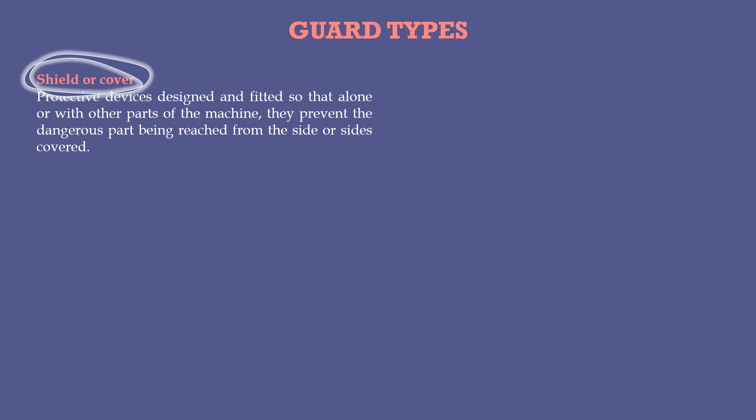Guard types. There are 3 types of guards designed to prevent contact with the moving parts by a person and/or clothing. These may be classified as shield or cover, casing, and enclosure, and are described respectively as follows. Shield or cover: protective devices designed and fitted so that alone or with other parts of the machine, they prevent the dangerous part being reached from the side or sides covered. Casing: protective device designed and fitted so that, alone or with other parts of the machine, it prevents contact with the dangerous part from all sides.

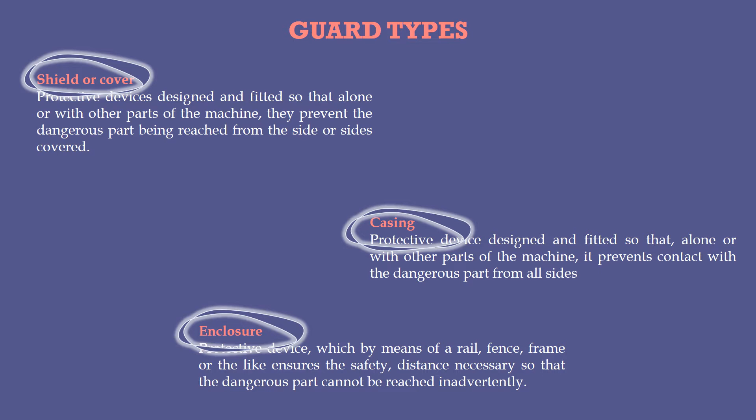Guard construction. Guards shall be sufficiently strong, unless it is clearly inappropriate. These shall, without cracking, tearing or permanently deflecting, withstand a perpendicular static load of 1,200 Newton, where a guard is in such position that it may occasionally be used as a step. Guards shall be rigidly fixed, have no sharp edges, be weather resistant and retain their strength under extremes of temperature. Taking into account the intended use, guards shall normally be permanently attached to the machine.

These may be easily opened, in which case these should remain attached to the machine in some way and should be provided with a convenient means to keep them closed. Permanent attachment includes the use of threaded fasteners, split pins, or other means that can be dismantled with common hand tools. A suitable warning notice shall be fitted to all such guards and to any opening in them without such securing devices.

In some circumstances, it is necessary for guards which can be opened to be designed so that the movement of dangerous parts is automatically stopped when the guard is opened, or the design prevents the guard from being opened until all movement of the dangerous parts has ceased. This can be achieved, for example, by designing the guard securing devices so that the part will stop before the guard is opened. Guards may be formed of a welded or rigid mesh or grill. The size of the allowable opening depends on the distance between the guard and the moving parts.

The design of the guard shall be such that it is not possible to distort the mesh or the grill during proper use in such a way that the opening size and distance relationship exceeds the limits.

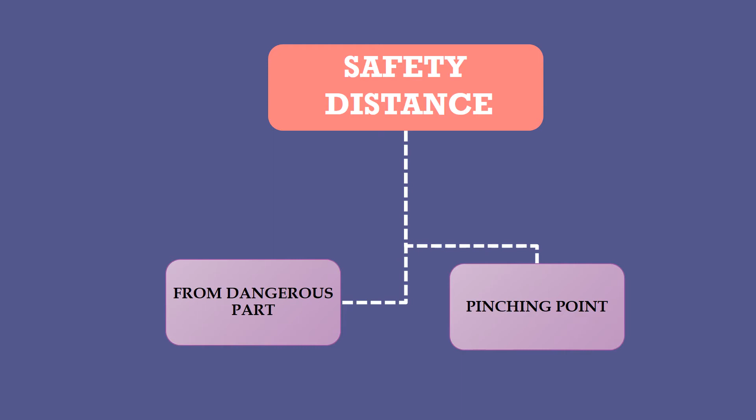Safety distance from dangerous part. The safety distance is based on measurements from the location where a person can occupy to operate or maintain or inspect the dangerous part. There are 6 classifications under dangerous parts: upward reach, reach below barriers, reach over barriers, round reach, inside reach through guards, and openings. Under openings is polygonal openings.

Upward reach. The safety distance for upward reach is 2,500 mm for persons standing upright. Reach below barriers. No safety distance is specified where it is possible to reach below a safety barrier, unless the aperture is small enough to be considered only in relation to finger or hand or arm access, in which case the requirements of openings may apply.

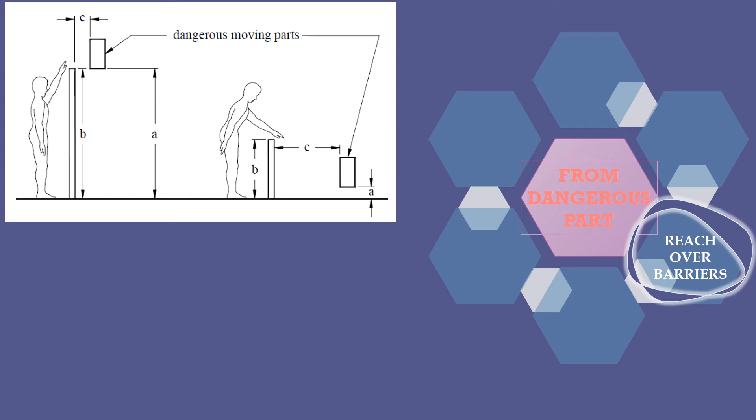Reach over barriers. The height of barriers which is less than 1,000 mm above the location shall not be acceptable. Seen in the figure is the principles for determining the distance required from a guard to the dangerous part. The safety distance for sideward or downward reach over barriers of 1,000 mm or greater height depends on: A, the distance from the ground level to the dangerous part; B, the height of the guard; C, the horizontal distance between the dangerous part and the guard. When designing a barrier, the dimensions in the table shall be met. Dimensions are in millimeters.

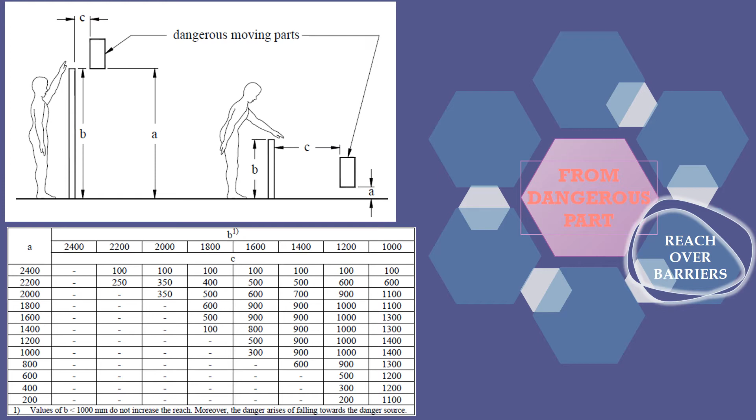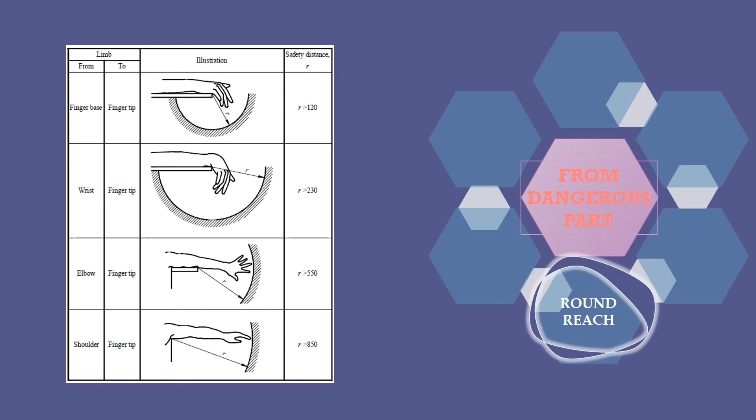Round reach. The table shows the extent of reach around barriers taking into account the aperture and the distance from other obstructions. Dangerous components shall be beyond these limits if they are not independently guarded. Dimensions are also in millimeters. Inside reach through guards. The safety distances depend on the shape of the openings.

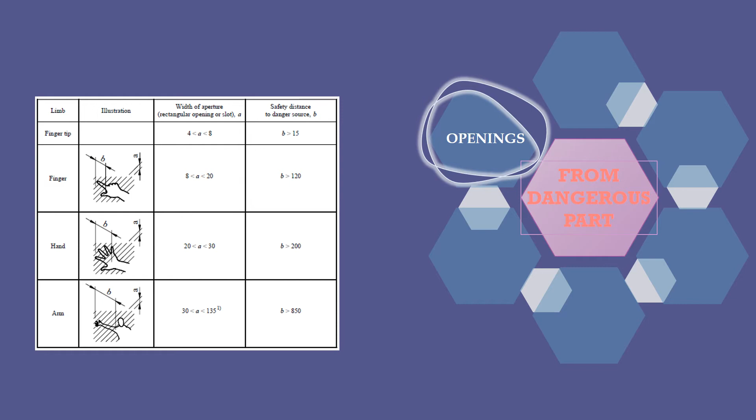Polygonal openings. Where the diameter of the largest circle that can be inscribed is not less than the distance between the 2 apexes that are the furthest apart, they shall meet the same requirements as for round openings. The diameter of the inscribed circle shall be regarded as the size of the opening. All other polygonal openings shall be regarded as slots.

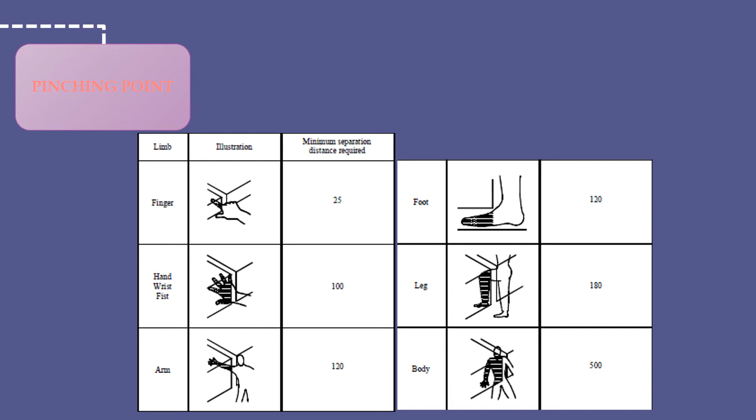Safety distance in pinching point. A pinching point is considered dangerous for the parts of the body illustrated in the table if the appropriate minimum separation distance is not maintained. The design of the machine shall ensure that the next bigger part of the body cannot pass through. Dimensions are in millimeters.

Provisions of information. Operating manuals. Where safety precautions are necessary during operation and servicing of agricultural machines, appropriate instructions shall be provided with the machine. Operating manuals shall also include a warning that a revolving hitch or a revolving clevis shall not be connected with a mating unit which also revolves on a towed machine or trailer.

Warning notices. Durable warning notices shall be affixed to the machine where parts present danger to the operator. Also included are circumstances where the inadvertent lowering of parts of equipment can cause danger. Particular danger or safety warnings shall be indicated on the notice. Existing national or other regulations may require specific symbols, sizes, layout or color. The warning notice shall be either pictorial or text in a language acceptable to the user or, if appropriate, the national regulating authority concerned.

Working stability. Machines and trailers that may create a danger to the user through tilting, as a result of the shifting of the center of gravity, shall be provided with means of preventing such danger. Hydraulically raised components that need to be held in a raised position to allow servicing or adjustment shall be provided with an independent and reliable means of retaining them in the required position.

Operator's workplace. There are 4 important things to remember when you are in the workplace: handholds and steps, operating positions, seats, and operating controls. Handholds and steps. Importance. Any machine on which the presence of a driver or operator is necessary, including any place to which access is required for service or maintenance, shall be fitted with handles or handholds and steps so the person has a safe, convenient means of mounting and dismounting.

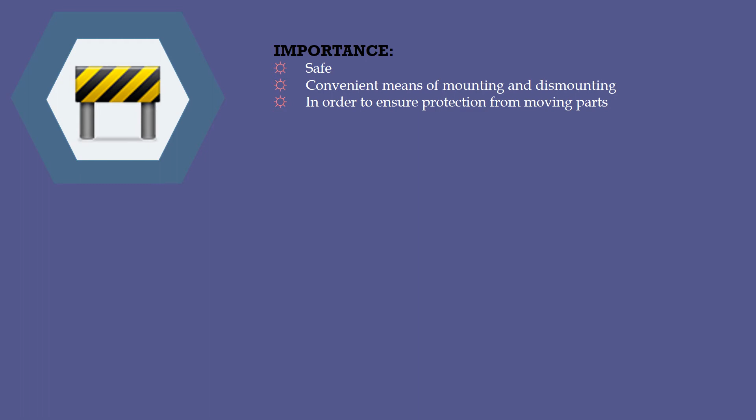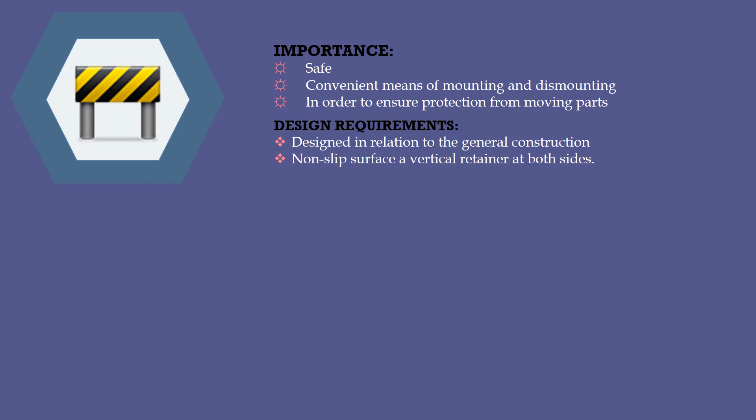Design requirements. Both handholds and steps may be parts of the machine if they are suitably designed and placed. Steps shall be designed in relation to the general construction in order to ensure protection from moving parts. If moving parts, for example tire sections, form restrictions or trapping areas with the steps, a suitable means of protection shall be provided. Steps shall have a non-slip surface and vertical retainer at both sides.

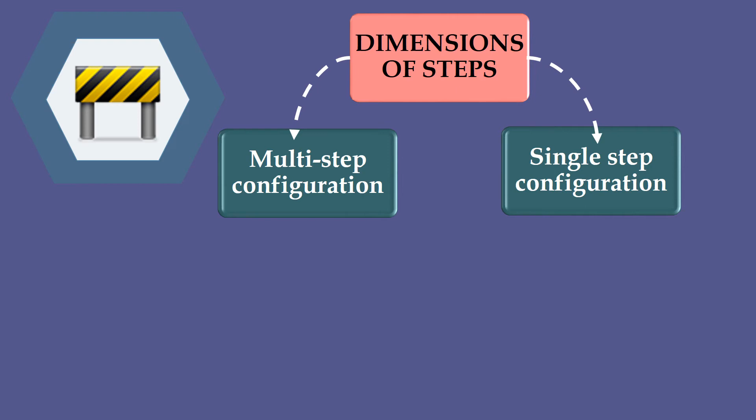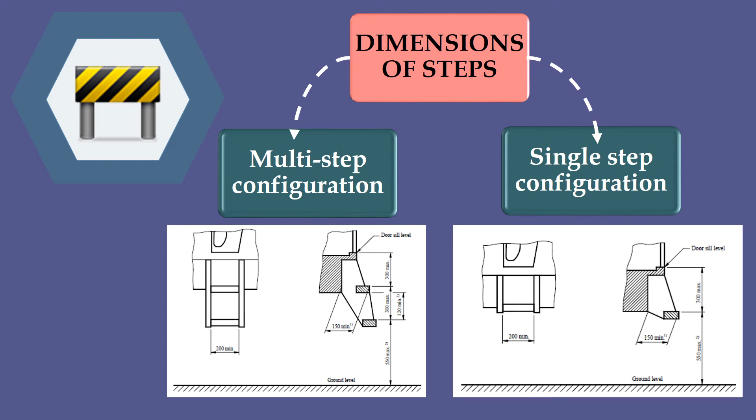Dimensions of steps. Multi-step configuration and single-step configuration. The dimensions for steps will normally be found in the parts of this standard relating to specific machines. Where there is no specific provision, the steps shall comply with the dimensions in millimeters as shown in figures. Where access is provided by a series of steps which are designed to be used alternately each by 1 foot, then the minimum width and height specified do not apply.

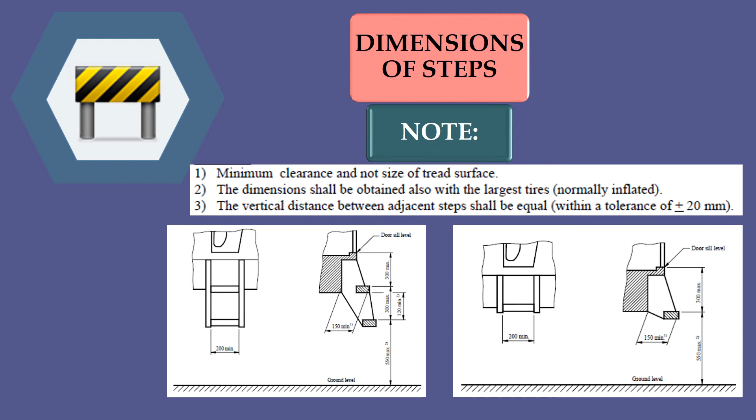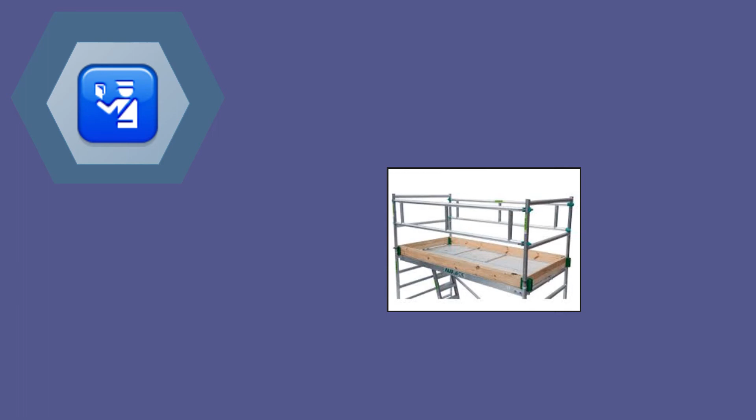Operating positions. Means shall be provided to prevent the operator from falling from his workplace. Any platform on which the operator is required to stand during the operation of the machine shall be level and shall have a non-slip surface, and if necessary, drainage shall be provided. Platform shall be provided with the following.

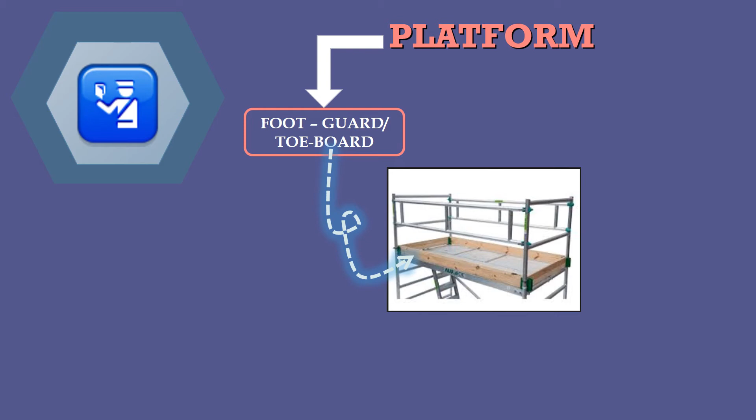1. Foot guard or toe board on all sides, which shall be fitted around the edge of the platform or not more than 50 mm farther away and shall extend not less than 75 mm above the platform. 2. Guard rail which shall be not less than 1000 mm and not more than 1100 mm above the platform, and an intermediate rail so that the vertical distance between any two rails does not exceed 500 mm.

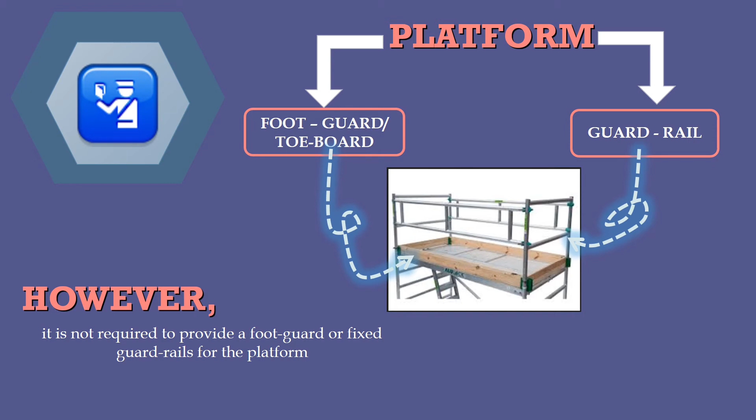However, it is not required to provide a foot guard or fixed guard rails for the platform: 1. When the machine itself affords protection at least equal to that which the foot guard and guard rail would provide if these were fitted. 2. When the operation permits access of persons or movement of material. A rail or chain shall be provided across the access when the machine is operating.

Seat. On a machine on which the operator is required to sit, a seat shall be provided which will adequately support the operator in all working and operating modes. Adequate and comfortable support and protection for the feet shall be provided. The operating controls, such as steering wheel or steering levers, transmission levers, cranks, pedals, and switches, shall be arranged and fitted in such a way as to allow safe and easy control and manipulation by an operator in the normal operating position. Pedals and controls shall be positioned so that they do not obstruct access. The function of the controls shall be marked on or near the control.

Steering mechanism. The steering mechanism shall be so designed as to reduce the force of any sudden movement of the steering wheel or steering levers due to reaction from the steered wheels. Lifting and lowering controls. Provision shall be made to protect and locate controls so as to prevent accidental operation which may cause dangerous movement.

Clutches. The following requirements shall be complied with where appropriate. 1. Foot-operated clutches. It should be located in a position convenient to the operator's left foot. To disengage, the pedal should be pushed forward. In the case of a combined traction drive PTO clutch, the PTO shall be disengaged on the second stage. 2. Hand-operated clutches. It should be located in a position convenient to the operator. To disengage, the control should be moved rearward. Control should be operated only with the operator in the operator's station.

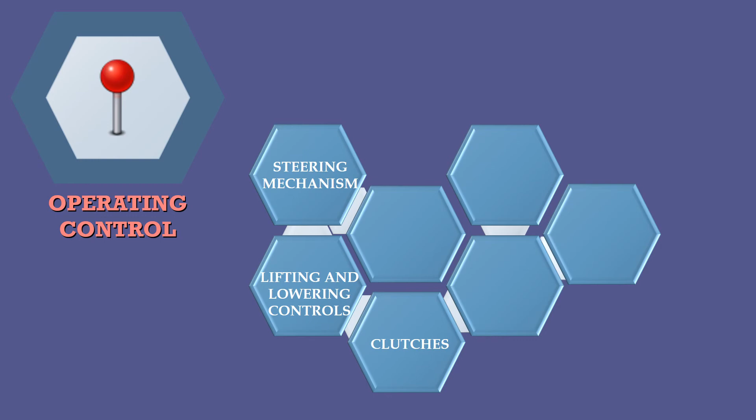Stopping devices for power sources. Every power source shall be fitted with a device by means of which it can be stopped quickly. It shall be so designed that it does not depend on sustained manual effort for its operation, and that, when it is in the stop position, the power source cannot be started unless the device is reset manually.

This device shall be readily accessible, on manned machines, to the operator in his normal operating position; on unmanned machines, on or near the power source or near the operating control position. The purpose and method of operation shall be clearly indicated. The control shall be red in color and preferably in contrast with the background and other controls.

Valves, taps and switches. In the case of hand-operated valves, taps and switches or other means of control provided for controlling pneumatic, hydraulic or electrical systems, the function and effect of the device in each of its positions shall be clearly indicated where necessary for safety reasons. Pedals. Pedals shall be of adequate size and of appropriate configuration. These shall have slip-resistant surfaces in order to minimize the possibility of the operator's foot slipping off the pedals.

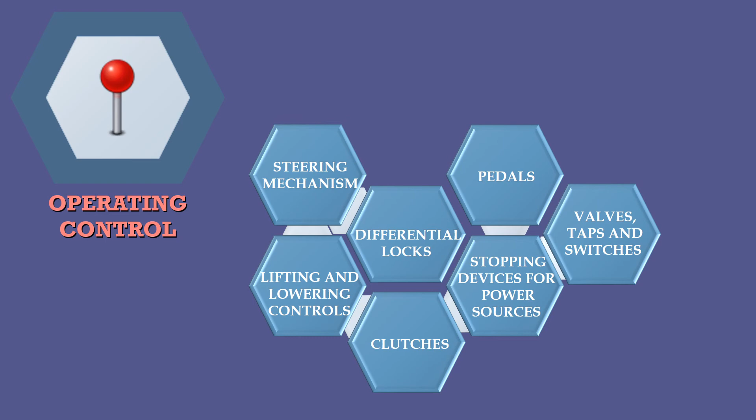And where necessary, be provided with a rim at the edge of the pedal. Differential locks. Any manually operated device fitted to a machine to lock the differential gear shall be designed and fitted so that there is a clear indication to the operator that the lock is engaged. It shall be designed so that it minimizes the possibility of inadvertent actuation.

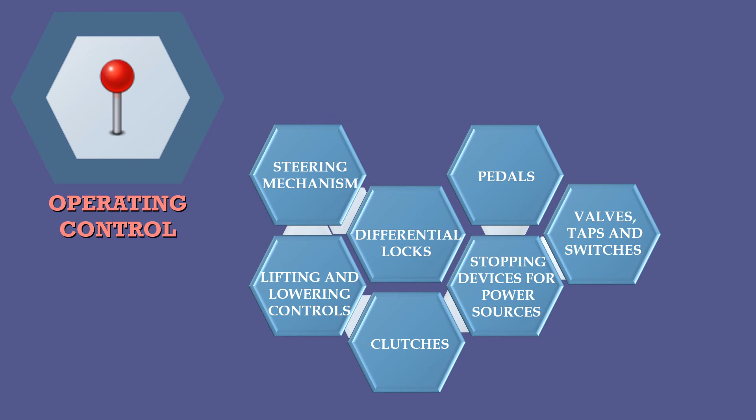Please refer to PAES 104 for the type, location, and method of operation of controls for agricultural tractors, self-propelled and pedestrian-operated machines, and for more information, means for moving and supporting machines. Hitches. Mobile machines that are not self-propelled shall be provided with suitable hitch devices. Machines used for towing or which are towed shall be provided with a towing device constructed and fitted to be secure for the purpose. Under hitches are as follows.

1. Hitch hook. If the towing machine is equipped with a hitch hook, it shall be in accordance with ISO 6489-1. The towed machine shall, in such case, have a drawbar eye according to ISO 5692. 2. Drawbars. The drawbar shall be situated in the longitudinal mid-plane of the tractor. The diameter of the hole in the drawbar should be 33 mm. The thickness of the drawbar shall be not more than 32 mm.

Jacks and supports. 1. Machines which are not stable when disconnected shall be provided with a jack or other support to prevent tilting. Supports shall be attached to avoid the risk of losing them, but these may be detached only if necessary to permit the machine to operate.

2. Non-stable machines or trailers having a drawbar shall be provided with a jack capable of raising or lowering the drawbar. The jack shall be constructed and secured to the machine so as to prevent the drawbar from falling when the jack is in use and shall have a base of adequate size to prevent it from sinking into soft ground. This requirement applies to all trailers of unladen mass exceeding 500 kilograms.

Any other machine when the machine is unladen and the downward force acting through the drawbar at the hitch point exceeds 250 Newton. The downward force acting through the drawbar shall be measured with the machine stationary on horizontal ground and the drawbar hitch point at a height of 400 mm above the ground.

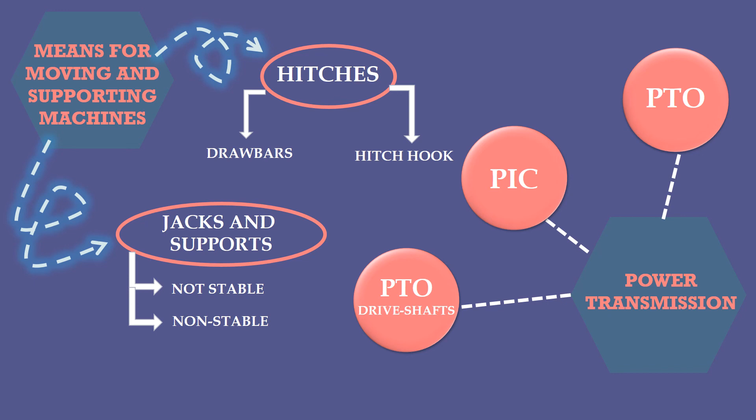3. PTO drive shafts. The drive shaft shall be protected as indicated in A. A casing which provides stationary protection against contact with the PTO drive shaft and protects the shaft throughout its length, whether the machine is towed, mounted, or semi-mounted, shall be fitted. B. The guard shall be firmly mounted, that is, it shall be detachable only by means of tools. It may be permanently fitted to the shaft. C. The provisions covering construction of guards shall also be met.

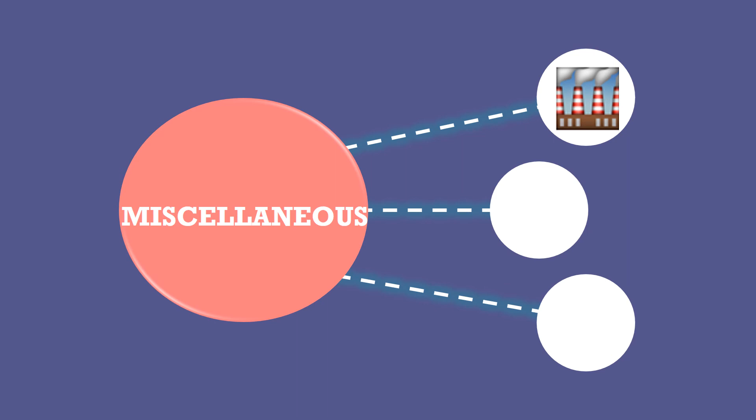Miscellaneous. 1. Exhaust pipes. The outlet of the exhaust pipe shall be located and directed in such a way that the driver or any other operator obliged to stand on the machine will not normally be exposed to harmful concentrations of noxious gases or fumes. For example, by locating the outlet over or to the side of the head level of the operator or the air intake of the cab.

2. Hot parts. Protection shall be provided to minimize the possibility of inadvertent contact with any exposed element which may cause burns during mounting, dismounting, or operating the tractor or machine. 3. Battery. The location of the batteries shall be such that hazards to the operator due to fumes and electrolyte are minimized.

Don't fall for society's illusion of success. We're all successful in our own way.